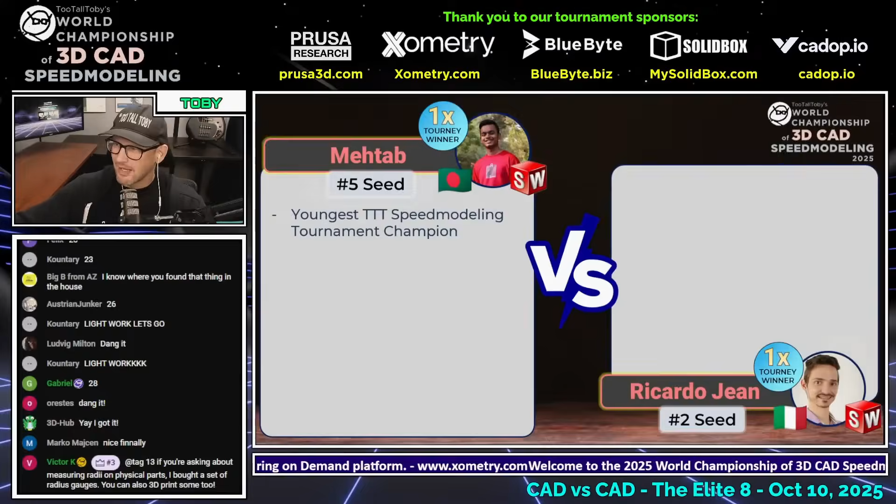Youngest TTT speed modeling tournament champion ever. He loves cycling, but doesn't have a cycle. He loves to speed run in video games like GTA and Cyberpunk.

And we got Ricardo Jean says, I love my wife. She is all to me.

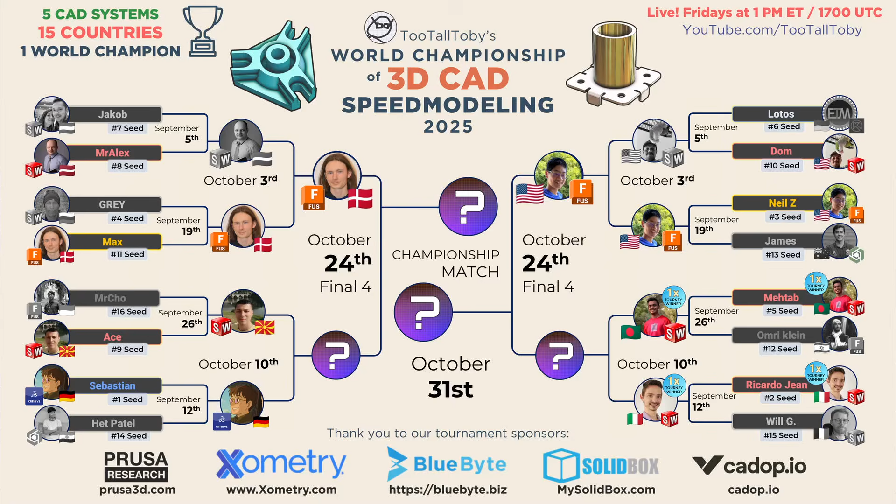SolidWorks user since 2006 version, 18 CAD years. Yo, that is a long time. Also, my brother and father are designers with SolidWorks. I'm Brazilian and Italian, speak fluently in both languages. And over the years of SolidWorks, have used SolidWorks in different languages.

Very cool. Tournament champion versus tournament champion, battling it out here in this Elite 8. The winner of these battles will win a 3D printer. Here we go. This CAD versus CAD battle begins in 3, 2, 1.

Both of our runners are grabbing a screen capture of this part. Both of our runners are jumping into their CAD system. Let's see how they do with this one. A little bit of a blast from the past, this one, but not an easy model.

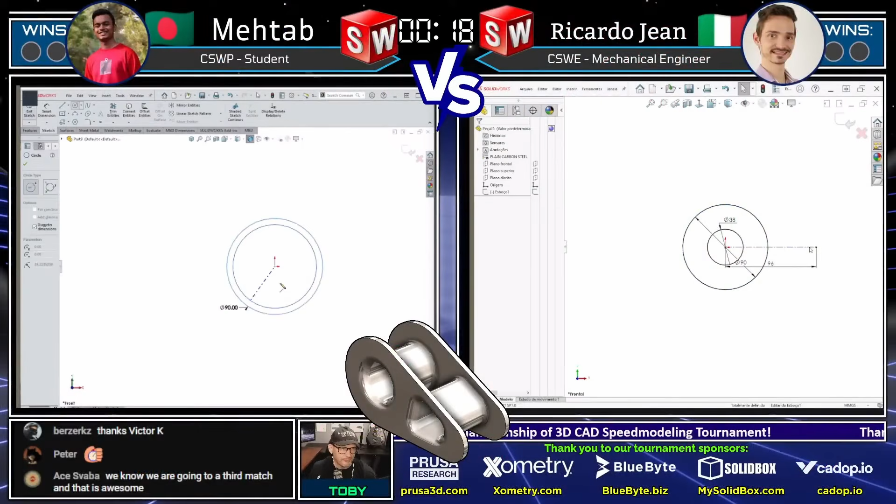We see here that Mehtab on the left, running SolidWorks, has started with a circle. Ricardo Jean on the right, also running SolidWorks, has started with 2 circles and a tangent arc, mirroring that tangent arc across. And look at Mehtab following him in step. Wow, wow, wow, both runners starting out with the same geometry.

Oh, but Mehtab kind of mixing it up a little bit, changing his path there. Looks like he's going to be doing a mid-plane extrusion. And Mehtab draws first blood, getting that first solid feature in place.

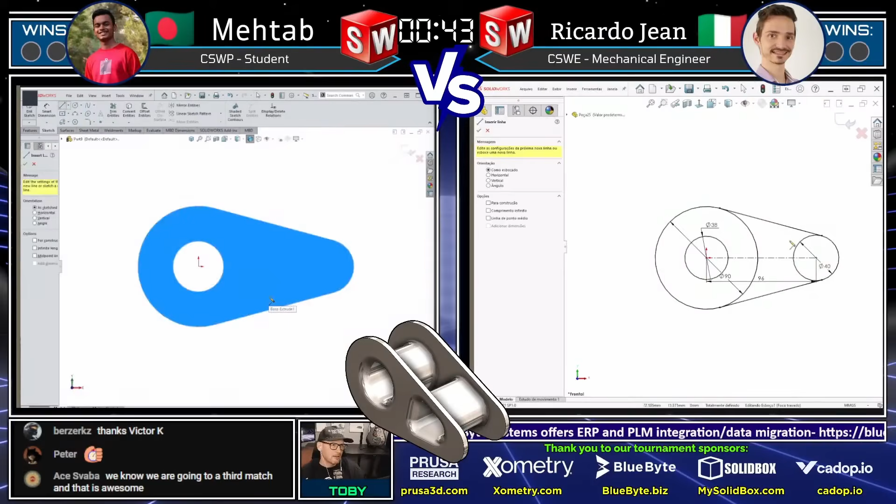We see Ricardo Jean getting in here and taking a very similar approach, extruding almost the exact same sketch. Guys, this is pretty cool. Both of these runners have been in the Toby community for a while, so they may have seen a part similar to this one. But of course, we always change things up for the tournament.

One of the things about this part that's a little tricky is getting that sketch located that they're both working on now. So let's see how they handle this.

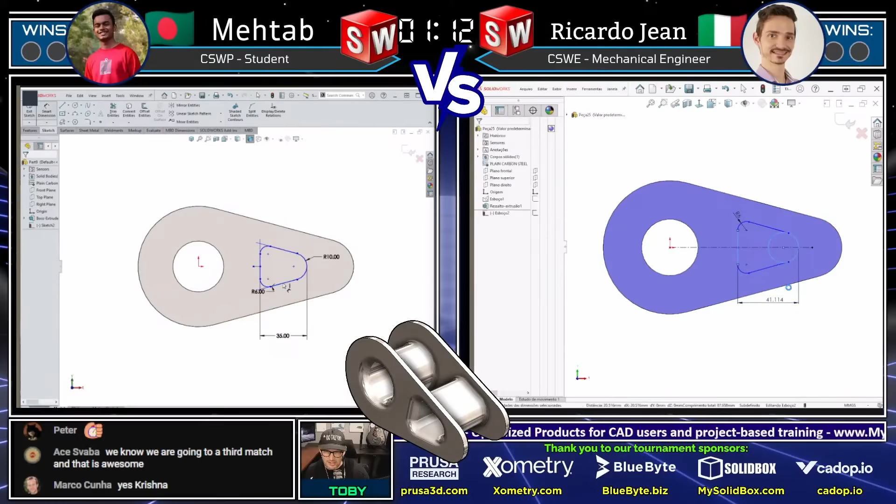It looks like Mehtab has created that geometry, has added in the appropriate relationships, and is adding in that offset dimension, locking that sketch down black, fully constrained. That's what we hope for when we are working in 3D CAD.

And we see Ricardo Jean on the right fighting with that sketch a little bit. Man, we've all been there, Ricardo. That is a difficult situation to be in, and he's trying to get through it here.

Interesting, Mehtab on the left launching the shell command, using the shell command to try to get this thing into its shape. That's a very interesting way to approach this model, and I gotta say, I kind of like it. I mean, I know that's his favorite command, and look at that thing.

Wow, that really came together quickly. And Mehtab blasting through this thing. Ricardo Jean, unfortunately, hitting a wall here with that sketch.

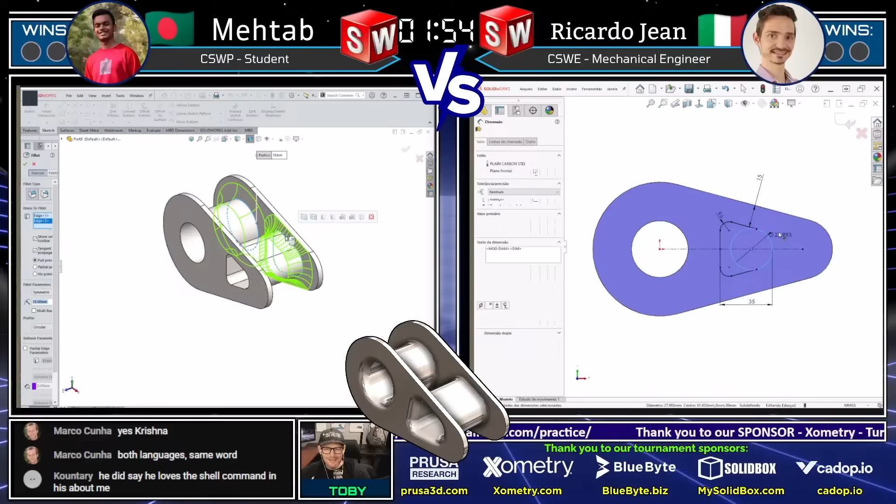I think that anybody out there who has worked with SolidWorks before knows how frustrating that can be. And it looks like he was finally able to get through that sketch. Well done, my friend. And wow, Mehtab on the left really blasting through this model and coming in with an answer.

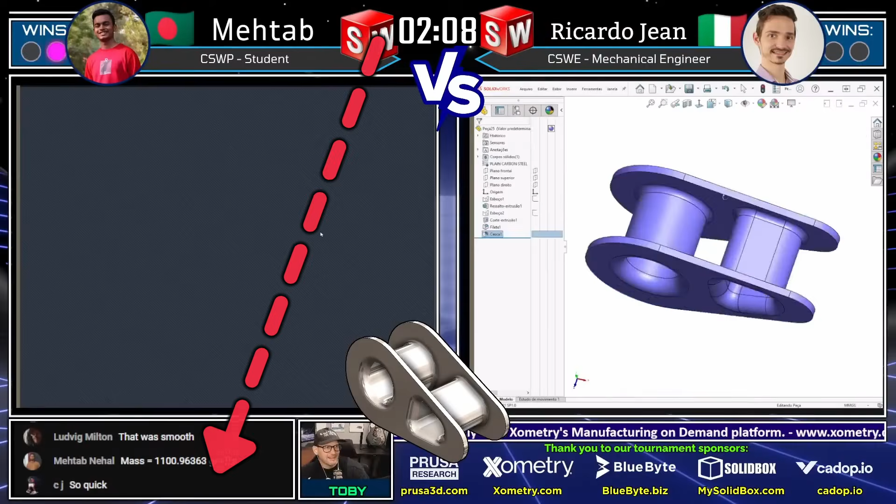1101 grams, and that is correct. Holy smokes, guys, that was a tier 4 model. And I think Mehtab finished that in just a few minutes.

And look at this, Ricardo Jean. Is he going to put it in the chat? Ricardo Jean brought up the mass on his screen. There it is, 1101 grams as well.

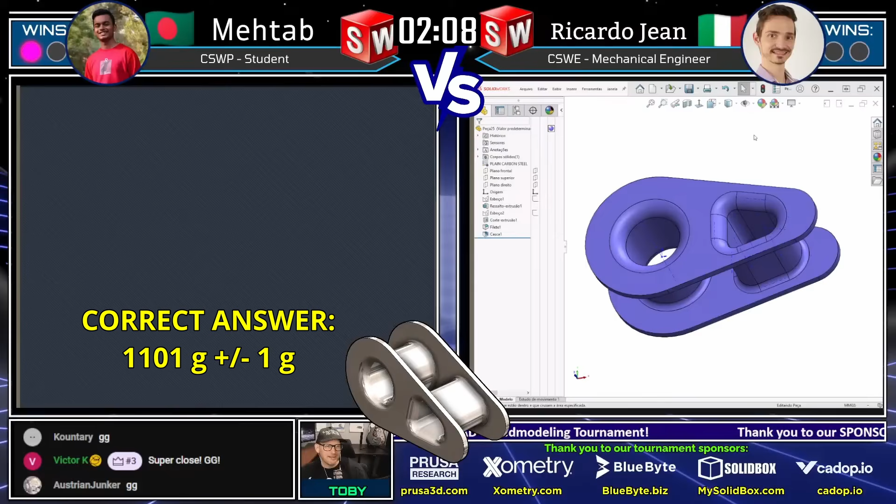Wow, wow, wow, both of our runners coming into the chat within a few moments of one another. That is super impressive modeling from both of our runners. My goodness, that's a tier 4 part, guys. And these guys both just blasted through that in a few minutes.

And man, if Ricardo hadn't gotten stuck on that one sketch, who knows, that battle could have gone to either of our runners. But wow, that was so fast.

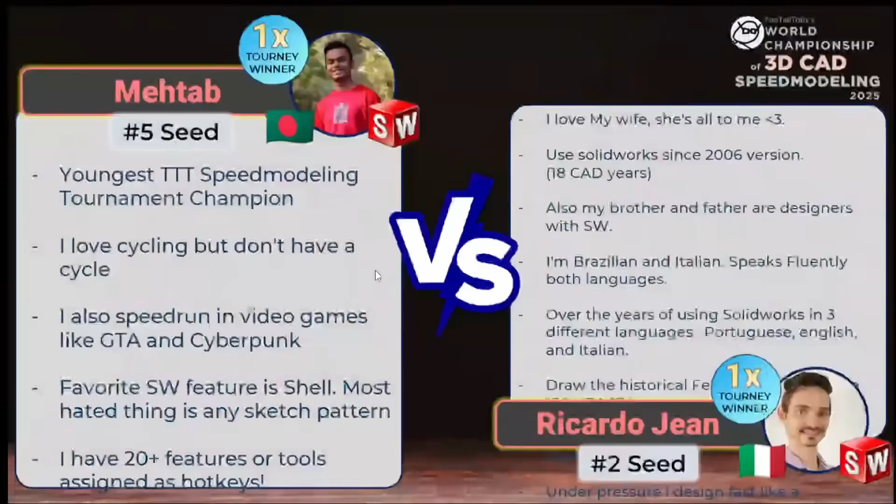And GG to Mehtab, earning that point. Wow, good job, my friend. Good game to Mehtab, earning that first point.

Of course, you got to win 2 points to move on to the final 4 to win yourself a 3D printer. But my goodness, that was super, super fast on that model. Well done to Mehtab.

Wow, wow, shell always amazes me. Yeah, Marco in the chat. Yeah, it's interesting.